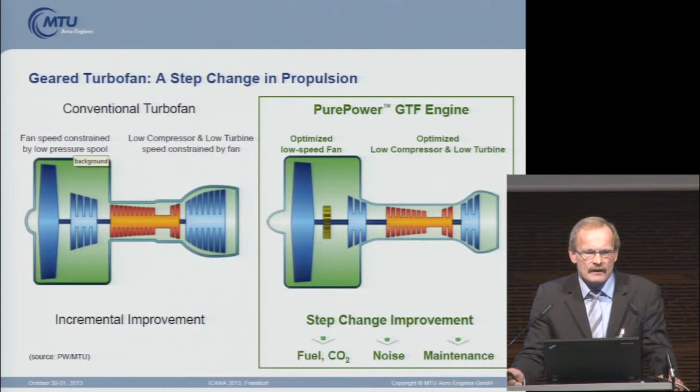Pratt & Whitney decided to carry it out, and MTU is a partner in this program. The advantage is that on the one hand, you have very clear improvements with component efficiencies. That is, the gear saves fuel, emits less CO2. The noise is reduced, but also maintenance costs are reduced.

Have a look at the geared turbofan. The most important component is the gear system, the drive gear system, which was developed new. It was regarded risky for a long time to have a gear system installed. There were a lot of tests carried out at Pratt & Whitney and MTU, and then this concept was implemented.

You need more components to build this geared turbofan. You need a high bypass, low-speed fan with a very high bypass ratio. The more the saving and the less the noise. We need a fast, low-pressure compressor, three times faster than the fan. All components on the low-pressure compressor have to be developed newly.

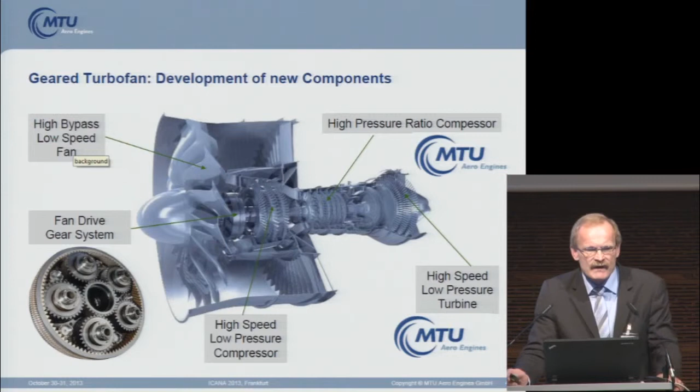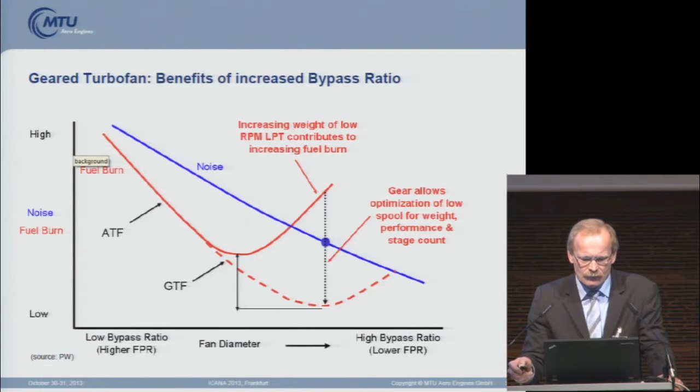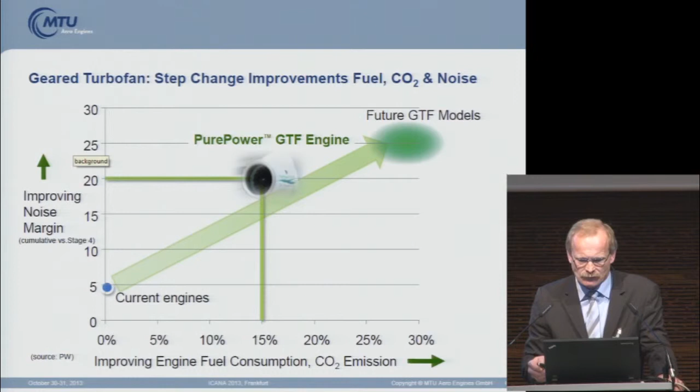Here are the famous pictures. You like to see them, I assume. These are the noise footprints. We heard about that several times today. Three examples. That's Frankfurt's runway west. The blue is the 75 dB curve. So with a comparable aircraft with a geared turbofan power, it can be reduced by 75%, the affected area on the ground.

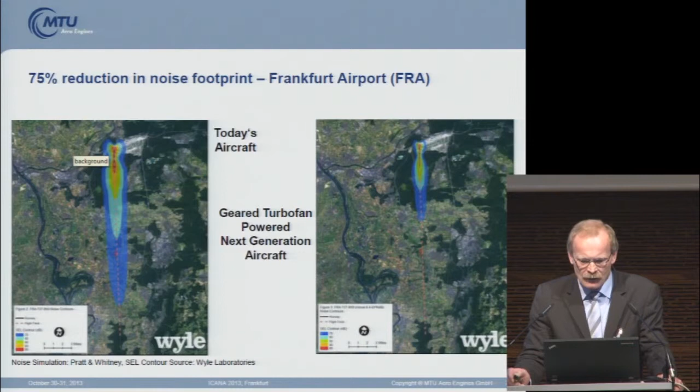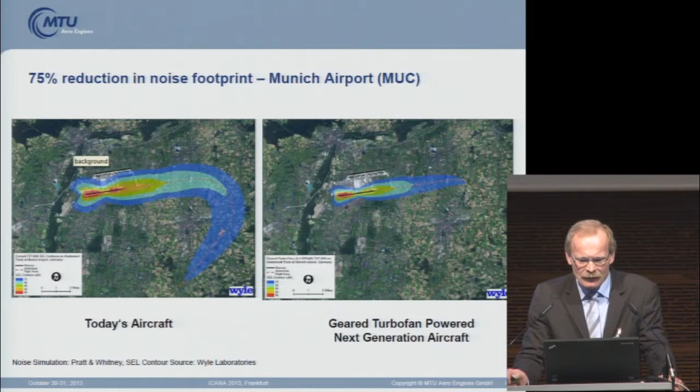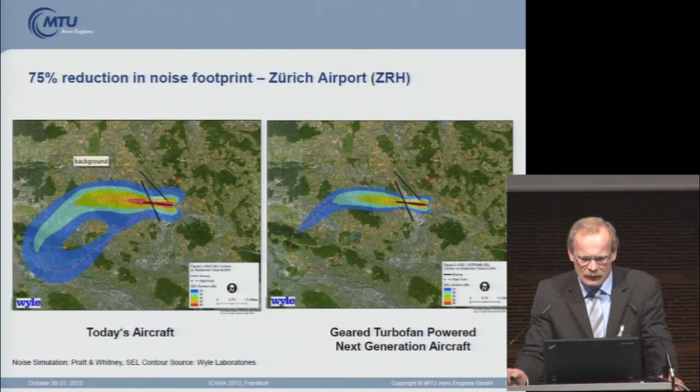Similar picture again, the Geared Turbofan, and maybe airlines are interested. It's always an incentive if there is fuel reduction and maintenance cost reduction, then they would buy the Geared Turbofan. We have more than 50% market share in the NEO. Lufthansa is represented here by Mr. Buchholz. They decided in favor of the GTF with the CSeries and the NEO.

And I think that shows that this is really a well-developed design. Not only fuel consumption is optimized, not only noise is optimized, not only maintenance is optimized. There are examples that prove that. The 6000 was a development in this direction, but this is a really balanced design where there are advantages all around. Maintenance cost improvement due to the fact that you have fewer stages. You have fast-running, lower-pressure turbines, much more efficient per stage than with a conventional system. You have fewer parts. You have relatively moderate temperatures at the moment and lower maintenance costs as a result.

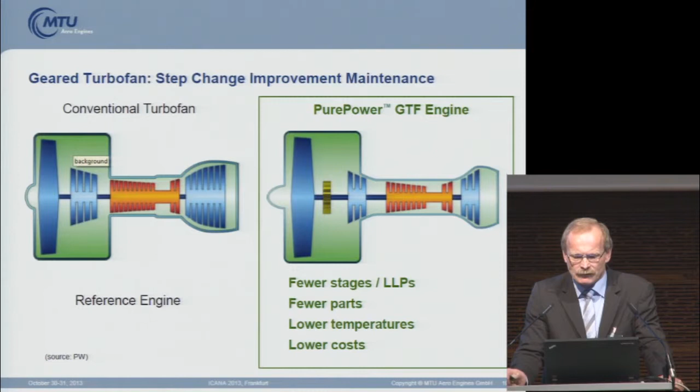If we summarize this, we assume that a fuel consumption reduction of 15% is possible, which means with a NEO compared to an A320, per year, a saving of $3 per gallon. That is about $1 million per plane per year. Then we have 3,600 tons CO2 reduction, which is about, according to 1,000 mid-size vehicles a year.

Noise, CAEP 6 minus 50% with the NOx emissions. So CAEP 6 here will fall short of 50%, and CAEP 8 will come very soon, so we're doing much better. Noise up to 15 to 20 dB cumulative compared to stage 4.

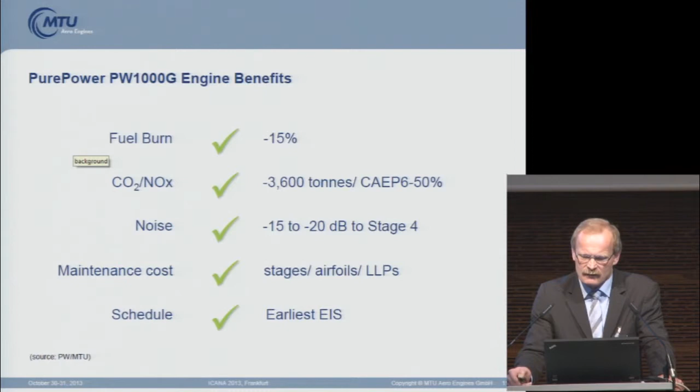Probably we reach that. We do flight tests already with Bombardier. We don't know the results as yet, but it has been confirmed already that it goes in the right direction. With maintenance costs, I mentioned them before, lower than with similar thrust at the moment and similar application profile, and we will launch this engine first. The competitor's engine will come 9 to 12 months later.

Now have a look at the applications for the Geared Turbofan. There are 5 applications. The first is the Bombardier C-Series, the CS100, the smaller variant, which will be launched in 2014. Lufthansa will also launch the first machines in 2014.

The second application mentioned here is not topical. I wanted to show you a later version, Mitsubishi, postponed from 2015 to 2017. Well, we are not affected that much in our region. There are 3 customers that are not in Europe at the moment.

Airbus A320neo, October 2015, that's still the target. I'll come back to that later, to talk about the state of the development here. And in Russia, we have the MS-21 of Irkut. It's similar to the A320 family, a bit larger, 160 to 220 seats. For that, the PW1400G is one of the 2 options here for the gear system.

For Bombardier, Mitsubishi, and Embraer, the Geared Turbofan is the only solution. For the MS-21 and the A320neo, there are 2 engine suppliers.

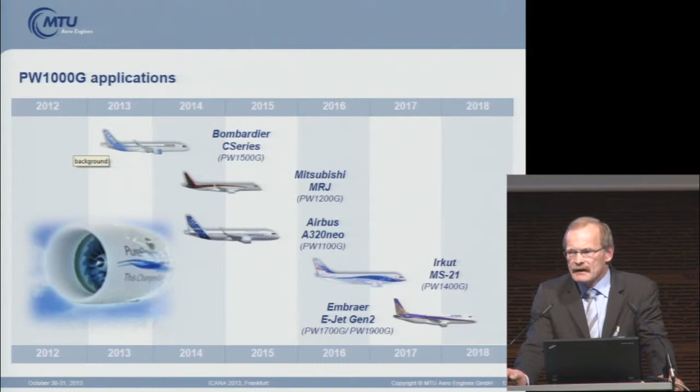Embraer, in January 2013, decided to do the re-engineering of the E-Jets, a successful aircraft family. More than 1,000 of them have been sold. They want to use the Geared Turbofan. They won't have 4 variants like the E170, 175, and 190, but they will only have the 175, 190, and 195. They will start with the E190 in 2018, entering service with the same gear systems with respect to the turbo as Mitsubishi and Bombardier use. A bit different thrust, a bit different installation, but similar turbo systems.

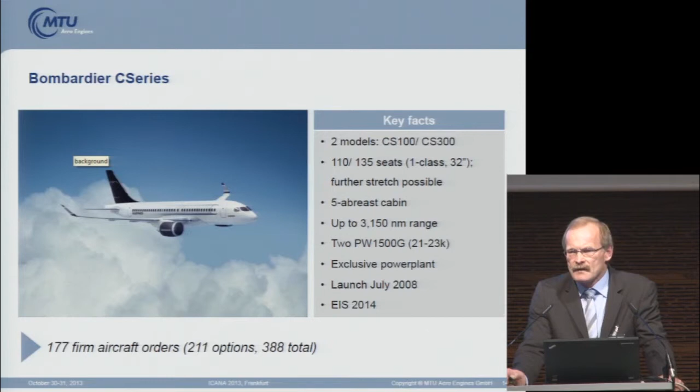Now, briefly about the planes. The Bombardier C-Series is a 5-abreast cabin, between regional aircraft and single aisle. 110 to 135 seats, all economy, range 3,150 nautical miles. Launched in 2008 with a fuel price of $4 per gallon. Enters into service in 2014. At the moment, 177 firm orders, 211 options, about 400 aircraft altogether in the pipeline.

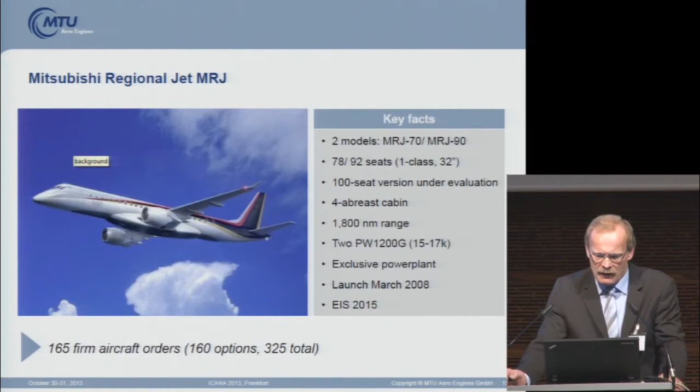Mitsubishi Regional Jet. It's a 4-abreast cabin. Launched in March 2008, before the CSeries. In 2017, it will start service. 165 firm orders and 160 options, so more than 300 aircraft in the pipeline.

The big hit, that's the A320neo, an aircraft which was ordered more than 2,380 times. And there are 1,090 options, so 3,470 in the pipeline.

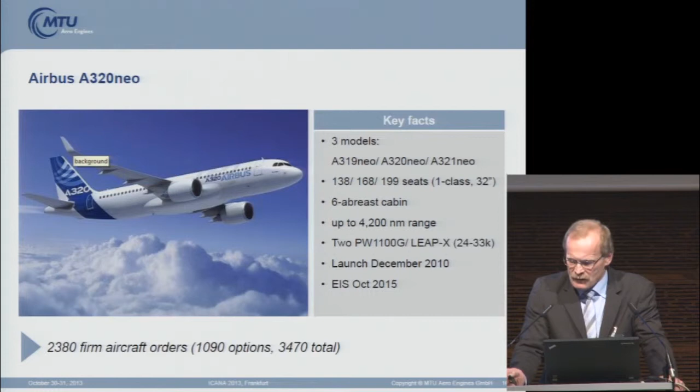Lufthansa ordered it as well with a Geared Turbofan. So it's 15% fuel saving compared to the A320. It's much quieter. We've seen the figures of Airbus today. So for the A320, 15 dB under Stage 4 will be reached. In December 2010 it was launched, and in October 2015 it will start servicing.

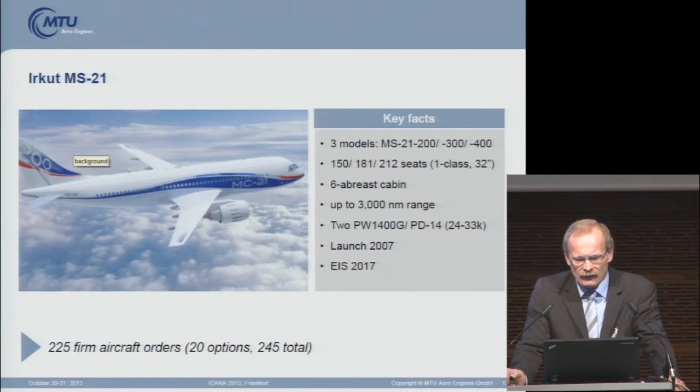Last application, the MS-21. I don't want to talk about it in detail. Similar to the A320. In 2017 they will start service with it, and one application is the Geared Turbofan.

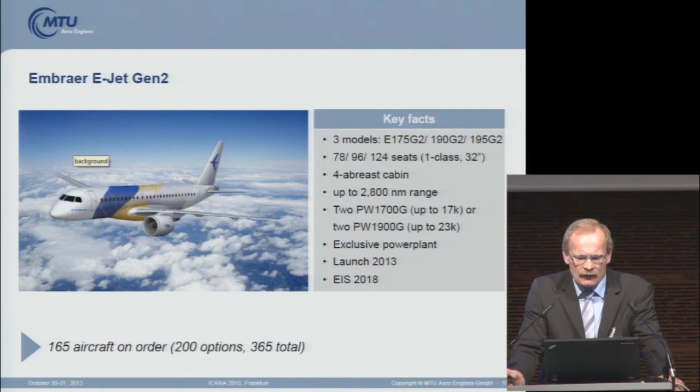The Embraer E-Jets, 4-abreast cabin, will start servicing in 2018. Has a bit shorter range; with only 4 people next to each other in the cabin, it's a bit limited with respect to the maximum number of seats. 165 orders have been placed, 200 options, a total of 365 aircraft.

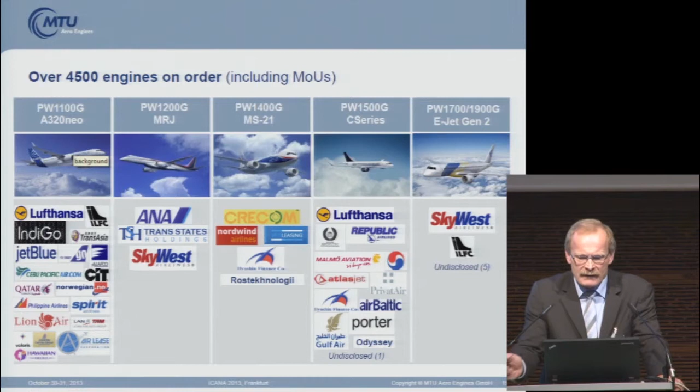So all this together would mean that more than 4,500 Geared Turbofan systems of different models have been ordered. The main point, more than 2,000 definitely for the A320neo, and the others break down to the 4 other applications.

Now, what's the state of the development of the Geared Turbofan? In February 2013, it was permitted and approved by Transport Canada. That is, it has its type certificate. It is mounted in the CSeries flight test aircraft.

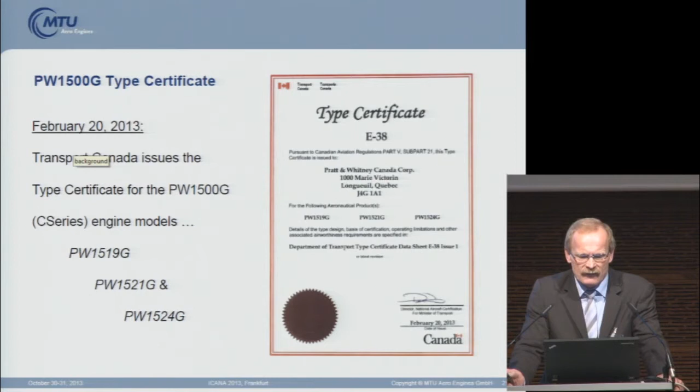The CSeries carries out flight tests at the moment, 2,500 hours altogether, and in the next 12 to 15 months they will finalize the tests, and at the end of the tests it will enter into service. So that will be in the middle of the 3rd quarter 2014.

First flight was on the 16th of September, a bit delayed, but not because of the gear system. The gear system was there in time. There were other issues. But I think the flight test runs sufficiently and successfully at the moment and will really achieve its targets.

If you take a look at the developments here, you've seen that most engines go into the NEO. So it's important to see how the NEO program does.

Well, the NEO program benefits from the two other development programs. The gear systems are very similar, the configuration is nearly identical. That is, the findings of the two development programs, Mitsubishi and CSeries, also go into the development of the NEO, and this takes risk away. That's a big advantage.

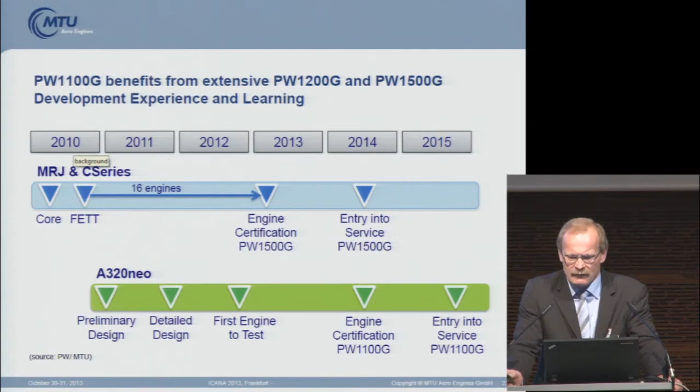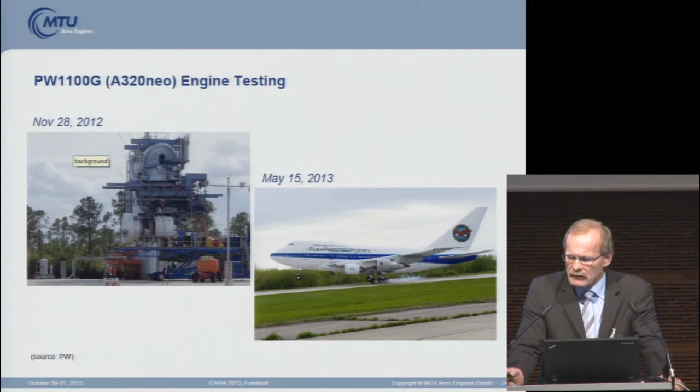Start of service end of October 2015. Well, that shouldn't be a problem. The NEO engine already flies. That's a flight test that I show you here. It started on the 28th of November 2012, and since the 15th of May 2013, the flight test program has started. Here, several hundred hours in the air have been mastered successfully.

How will the future of the Geared Turbofan be, as we see it?

There's one application where the geared turbofan was not applied: the Boeing 737 MAX, a further development of the 737 NG. One big reason was that the landing gear was smaller, so the fan diameter on the 737 was highly limited. For that reason, the geared turbofan cannot fully exploit its advantage to 100%. There would have been a compromise solution that would lead to a situation where it would lose compared to the competition. Basically, the geared turbofan is not limited to the thrust class it's being used at the moment, 16,000 for the A320, up to 30,000 thrust, probably with a different transmission. It can be adjusted to any thrust range.

There is also mention of a follow-up to Boeing's 757, but also larger aircraft up to wide bodies.